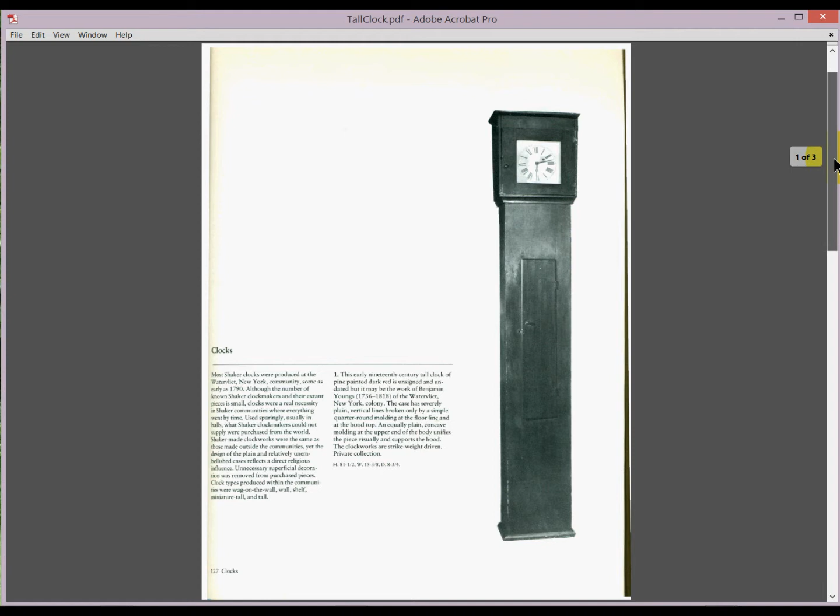In this activity, we're going to be building a grandfather clock as shown in the PDF file. It's a shaker clock that was constructed in the 1790s, and we have an isometric view and some details, and we also have a cut list, which is very handy.

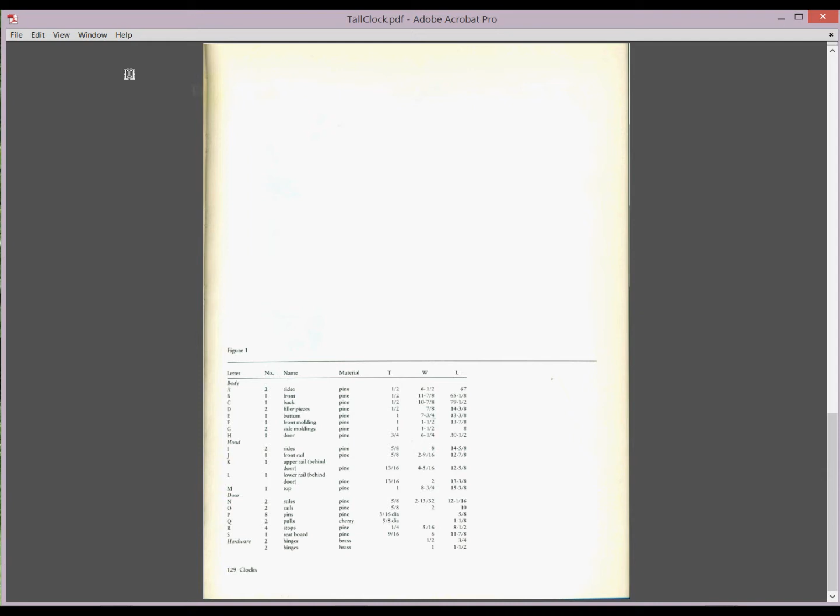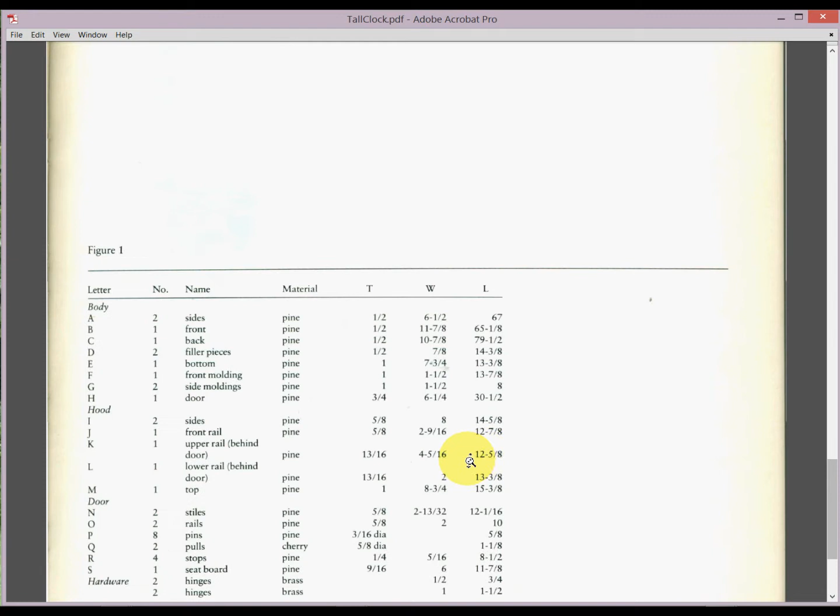So we can go ahead and zoom in on this cut list and take a look at it. You'll notice that we have some sections for this, so we're going to start with the body of this.

First thing we'll do is get our AutoCAD open. When you have AutoCAD open, let's make sure we're working in the 3D modeling. Then come down to the bar on the right, go to the settings, and make sure that your object snap is at the endpoint, midpoint, and center. Let's go ahead and get ourselves in a front view, and we'll go to the 2D wireframe.

So let's go ahead to our cut list and we'll start making the clock. We're going to start with the back, and if you look on the cut list you'll see where the back is, and it's 79.5 inches, and it says the body is number C.

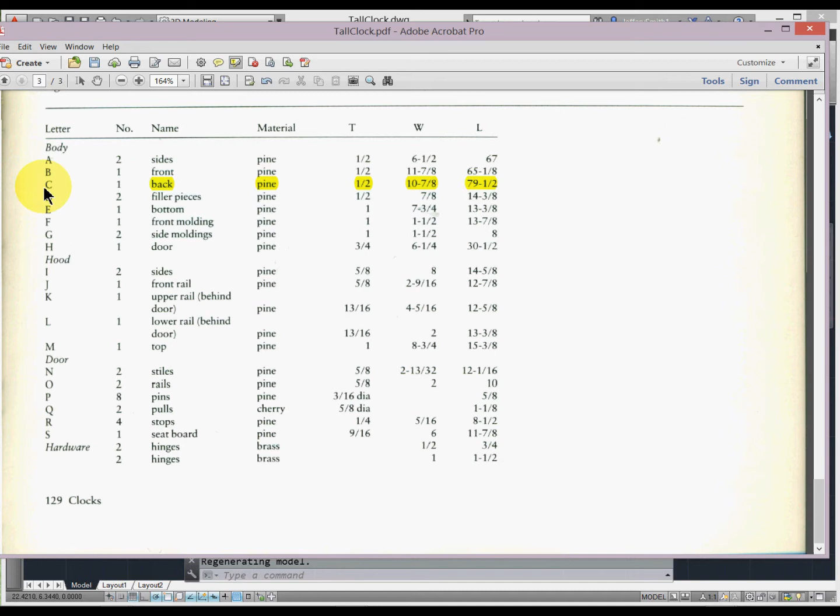So let's go ahead and double check that. Now the nice thing about this PDF is it actually has the components broken down here. If you look right here, it says the back is 79.5 by 10 and 7/8. So let's go ahead and construct that in AutoCAD.

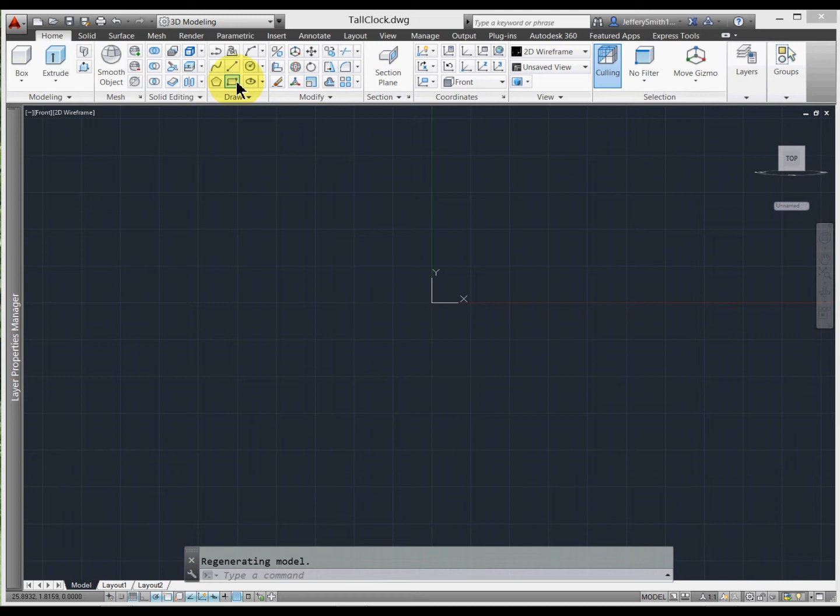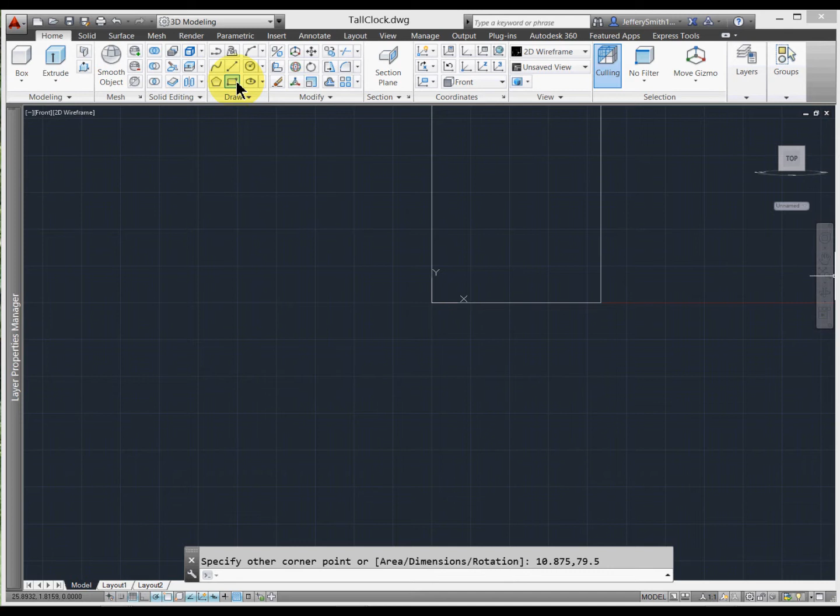Let's make sure we're in the front view, and we'll select the rectangle, and we'll type that in. So I'll go ahead and select the rectangle, type in 0, 0, enter, and then the X is 10 and 7/8, which would be 10.875, comma, and then 79.5, so that's 79.5, and press enter.

And I can just go ahead to the front view and it'll center it for me. Zoom out a little bit by scrolling my mouse, and I'll type in extrude, or I can select the icon above. Select the object, and it's a 1/2 inch. Press enter, type in 0.5, and then I can look at it in a 3D view to make sure I've actually done that. So we'll go shaded, and let's look at the Southwest isometric, and there we have it.

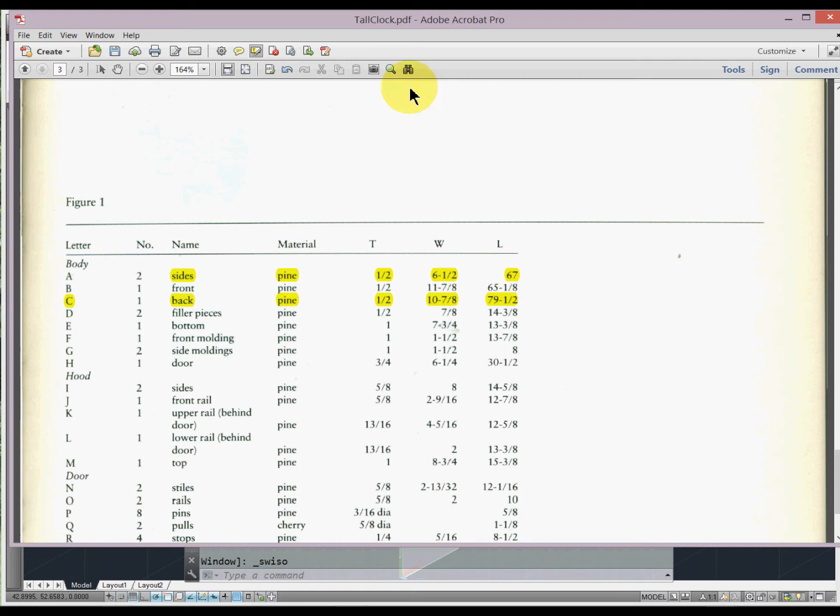Alright, so the next thing we want to do is build the sides. Again, you want to confirm this at the sides here, and it says it's actually A, and I can look at the dimensions, and I can also just go off this cut list. So we'll do the sides now. It's going to be 67 by 6.5.

Let's go ahead and get ourselves to either the left or the right. I'll go to the right view here. Now you notice that the coordinate is showing that it's to the front, so we'll have to move this. But let's go ahead, I like to start at 0, 0. It makes my life much easier. Then the side is 6.5 inches, so 6.5 by 67 inches.

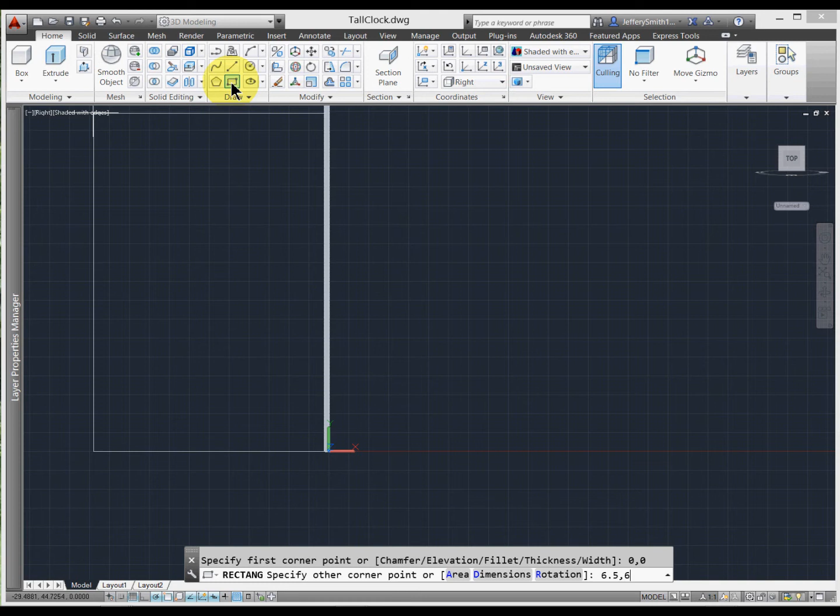Then press enter. Again, let's go ahead and extrude this object. I'll select it on the icon from the ribbon above, select the object, press enter, and then type in 0.5. Let's look at this in 3D.

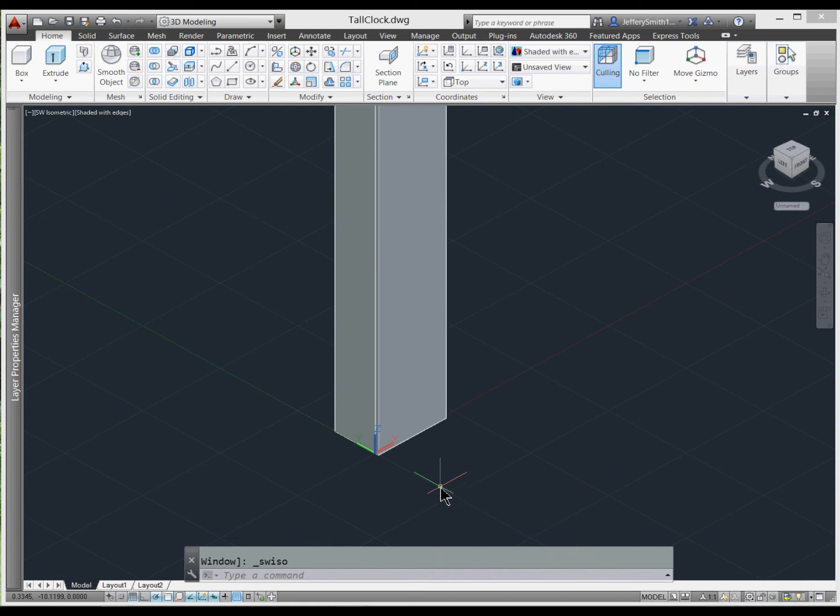Alright, so right now if I would look at the top, it's actually going the opposite direction. I want that to come to the front. So what we'll do is we'll go back to the Southwest isometric. It might be easier if I did this in the 2D wireframe. I'm going to go ahead and move this, so I'll just type in M or type in move and press enter.

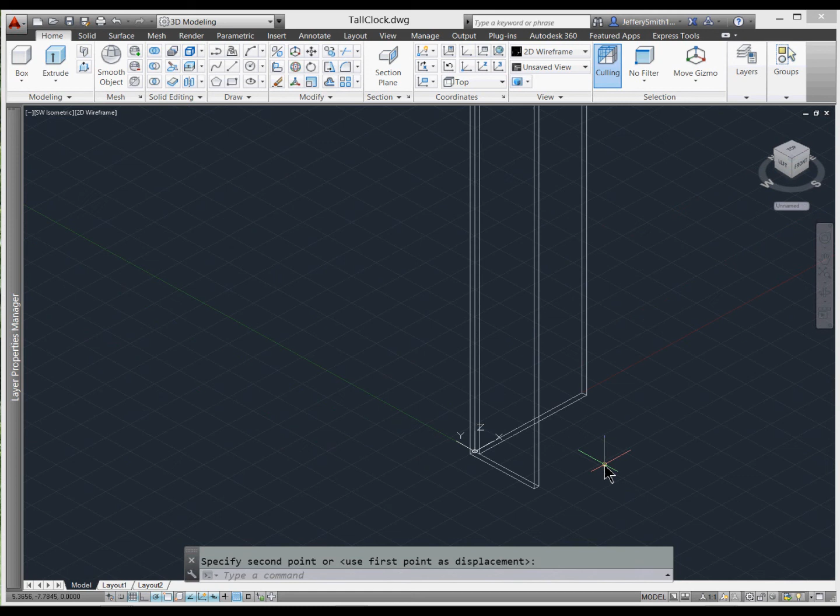I'll select the object, press enter. I'm going to go ahead and zoom in on this, and I will take the corner and put it to the corner of the back. And if I look at the top view, I will see there.

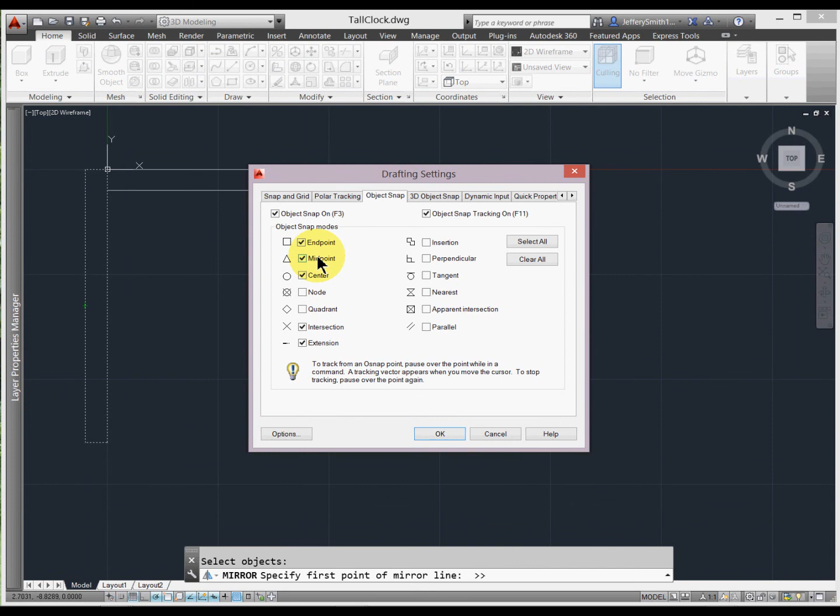Now let's go ahead while we're here and type in mirror. M-I-R-R-O-R, press enter, select the object, press enter, and you'll see a triangle. Now if that triangle does not appear, it's because the settings for the midpoint of the object snap have not been selected. So go ahead and select the triangle, come down or up, and press enter. It defaults to no, do I want to delete the first one? No, and there it is.

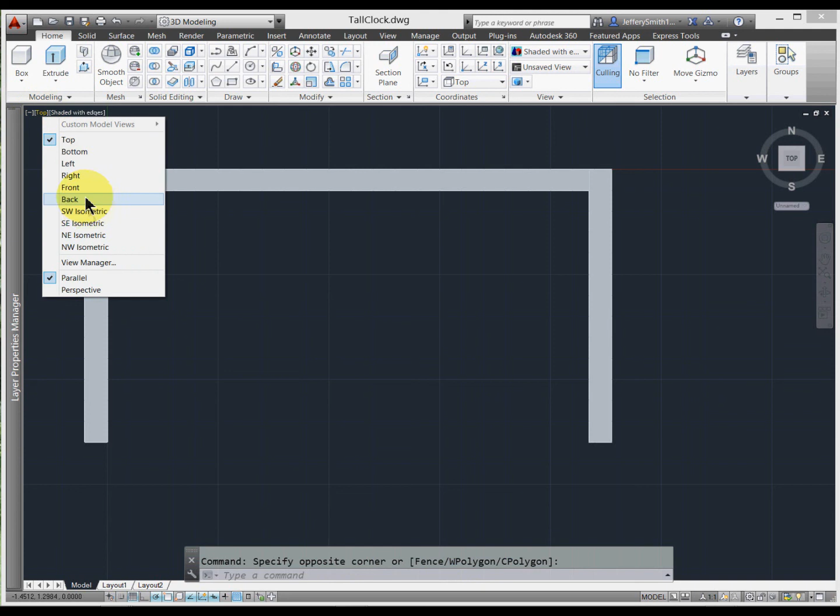Look at it in 3D in a shaded with edges view. Okay, so we're moving along.